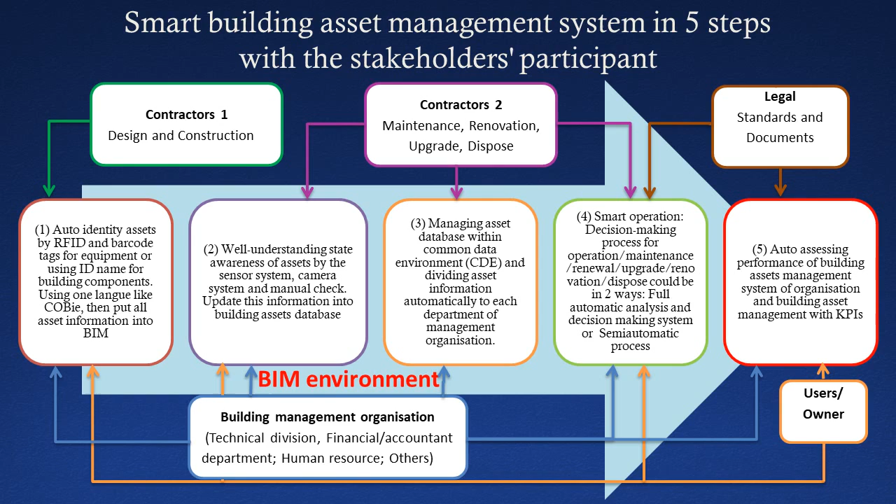The detail of each step will be shown in the next slide. In the first step, identification, all the assets of the building will be identified by two-dimension barcode, RFID, and ID code, in which the static data and social information will be added into the asset database.

During the life cycle of the asset, the state and condition of them will be checked manually by the manager or automatically updated from the sensors. The information collected in step 2 will be transferred to step 3 to manage and divide into the related departments.

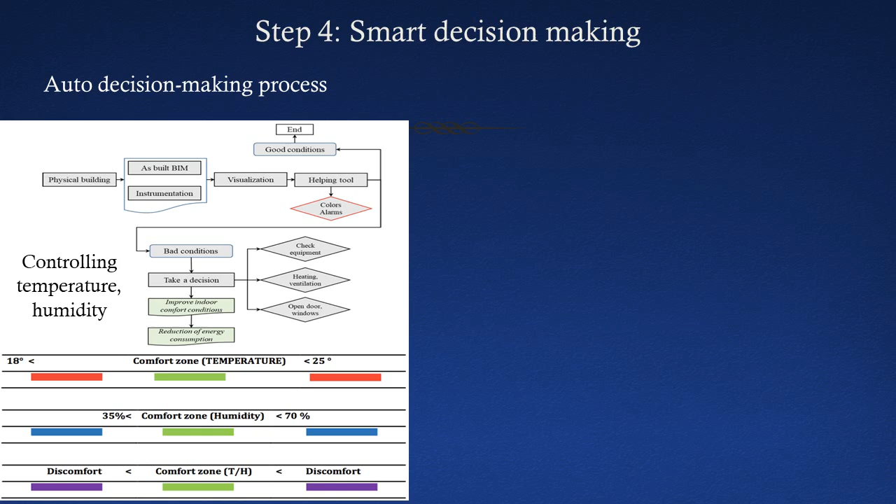After step 3, the smart decision-making process will include the auto decision-making process. We can control the temperature and humidity for maintenance plans and predictive maintenance.

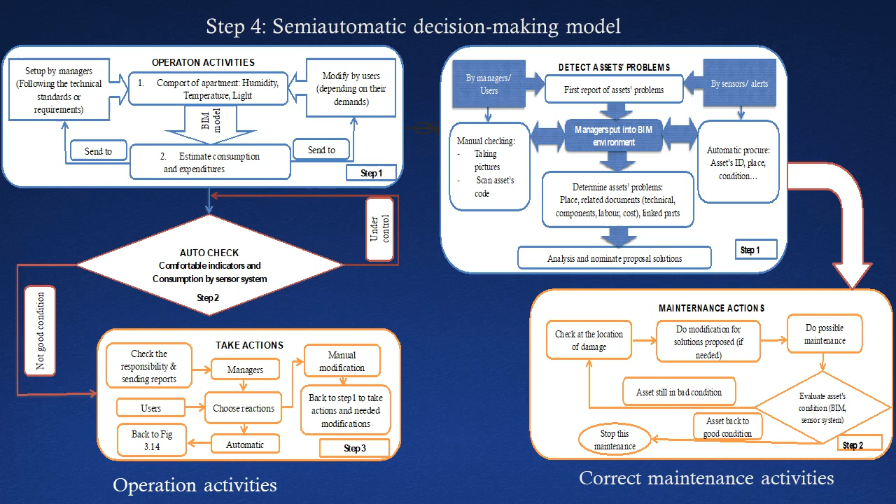Step 4 also includes the semi-automatic decision-making model, which includes models for operation activities or for corrective maintenance activities. The semi-automatic decision-making process can also be applied for choosing a plan to do maintenance, renewal, upgrade, renovation, or removal.

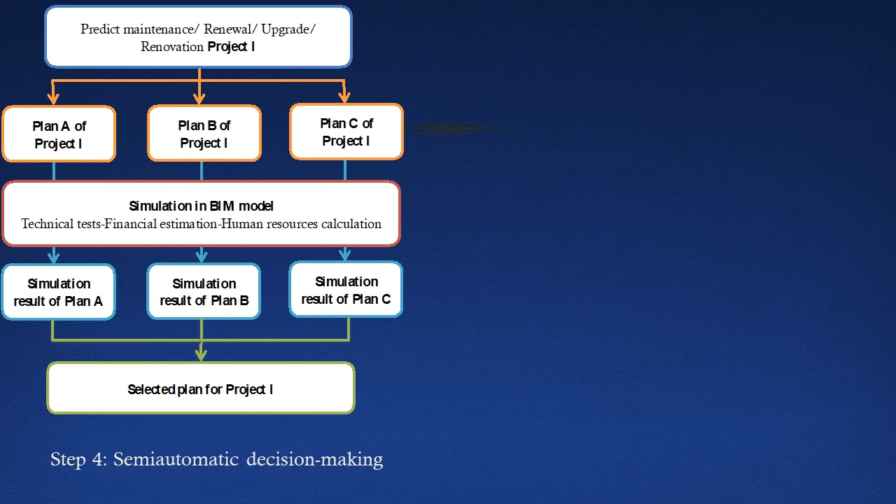After each activity or process, measuring the performance can be done. The key performance indicators related to financial, functional, sustainable, and user satisfaction will be calculated to evaluate the performance of the management process.

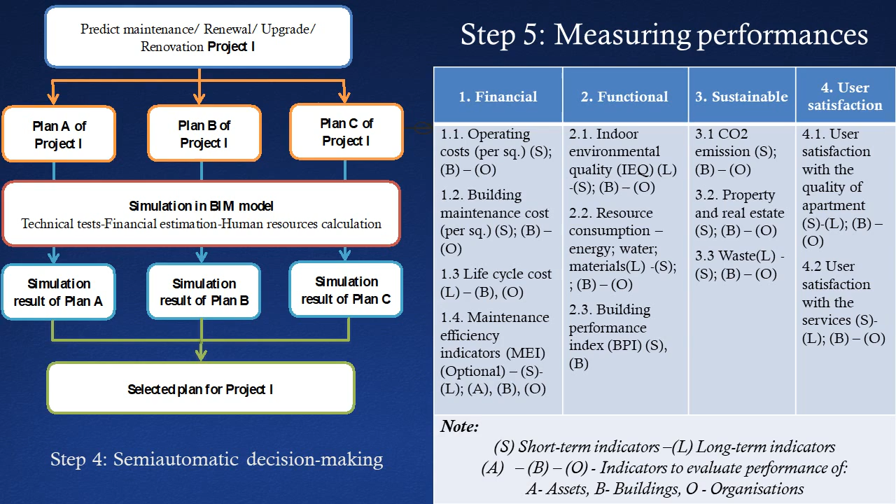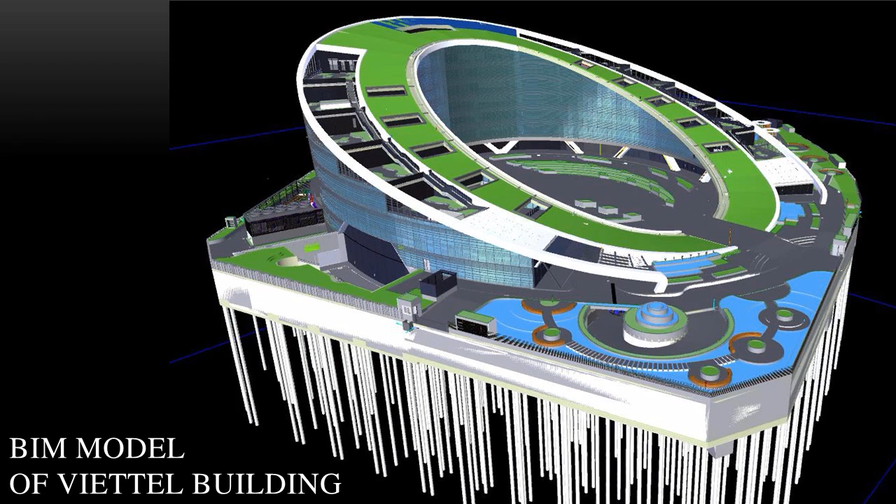This building has a silver LEED certificate. Here is the BIM model of this building. On the screen is the model of the architecture and structure parts. Here is the technical part, which includes the electricity system, the fire protection system, the HVAC system, and here is the plumbing system.

As we can see, the Viettel building is extremely complex and requires a smart asset management process. The manager has leveraged the Autodesk BIM 360 Ops environment to manage this building.

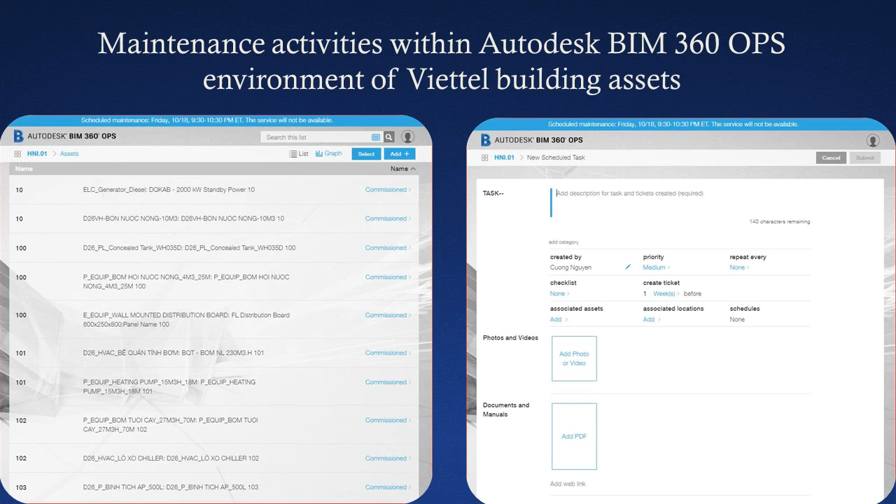All the maintenance activities will be assigned to the maintenance contractor via Autodesk BIM 360 Ops. This environment can be opened easily on a desktop or mobile device like an iPad, iPhone, or Samsung mobile. It's easy to open.

The maintenance contractor can also easily participate in the Autodesk BIM environment. By opening the work task on this, the contractor can easily see where the asset that needs to be maintained is, and when they come to it, they can scan the barcode and access information related to the treatment history of this asset.

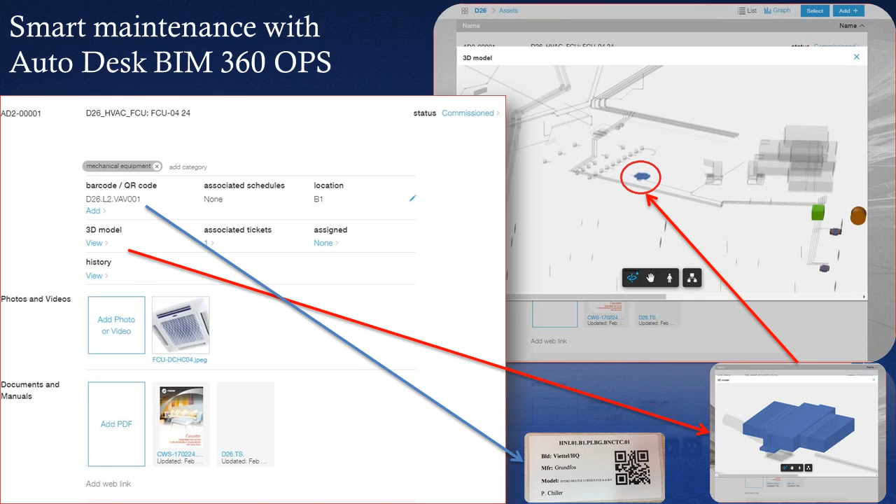After the contractor performs the maintenance, the owner or manager can access the historical treatment to evaluate the performance of the work, and from that they can easily see the condition of the asset and evaluate the performance process.

As we can see, the Smart Building Asset Management Model application in Viettel buildings has achieved results in all 5 steps. However, it still has some limitations.

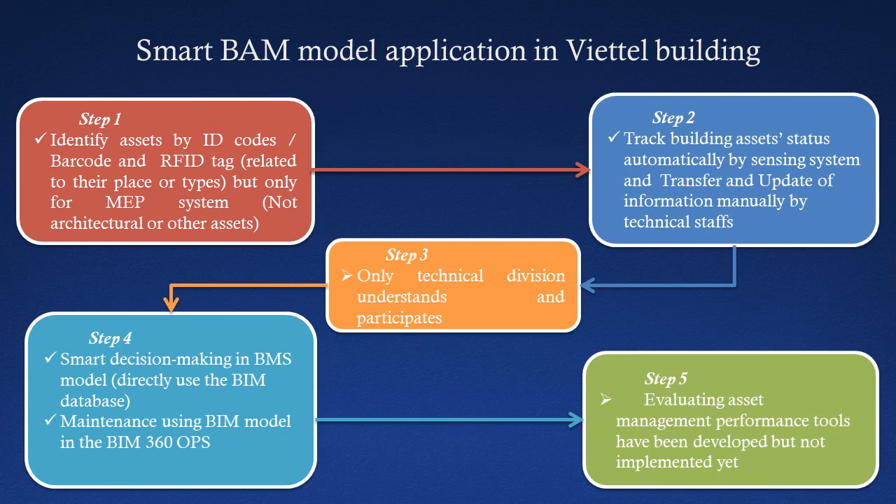For example, in step 1, only the MEP system has been identified, but not the architectural and other assets. In step 2, the transfer and update of information is done manually by the technical staff. And in step 5, the evaluating asset management performance tool has been developed but not implemented yet because these buildings have just been constructed.

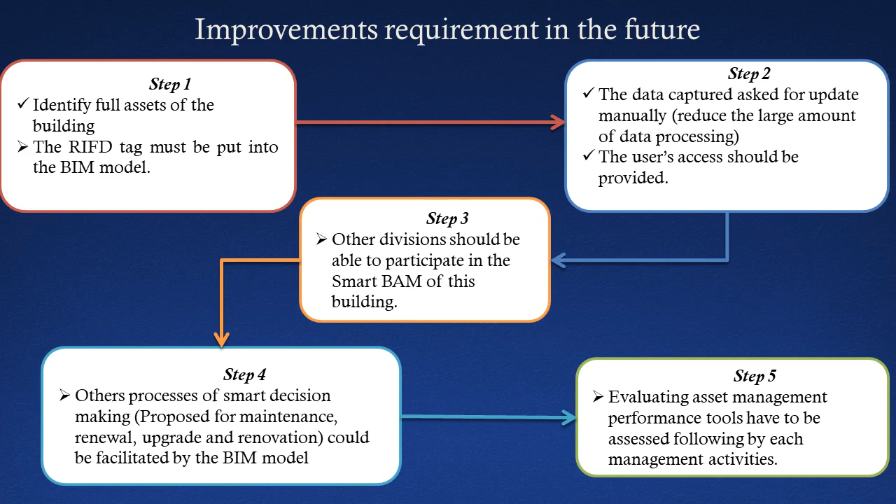Therefore, in the future, the Viettel building manager has to improve their work to have better performance of the asset and management process.